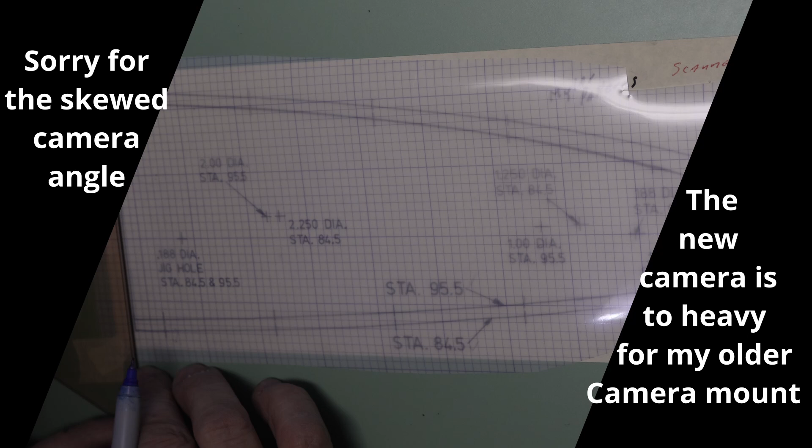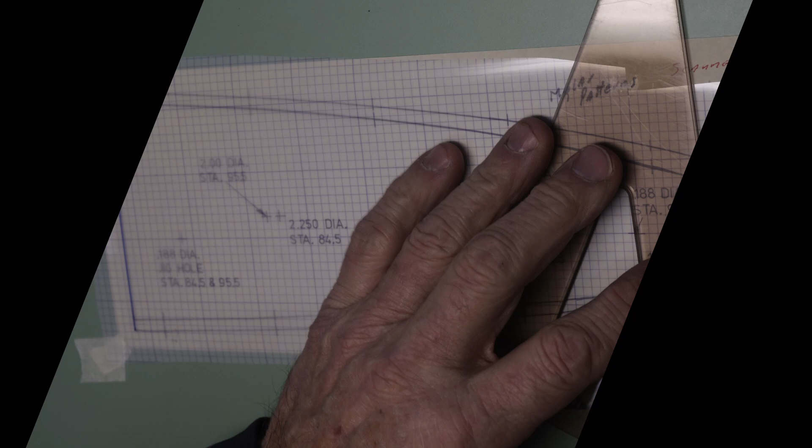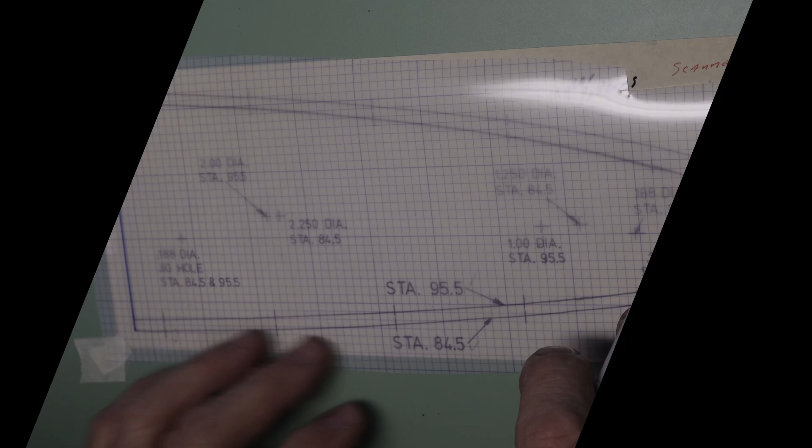All right, a little quick tip you might find interesting. I'm transferring some paper patterns for wing ribs over onto Mylar because Mylar will not stretch, so I can take Super 77 spray adhesive and glue it to material to build form blocks out of. If you use regular paper and apply glue to it, it will stretch. Mylar doesn't do that. Same way, if you use a photocopier to copy your plans, it's not going to give you actual dimensions. So what I'm doing is just transferring over to this Mylar.

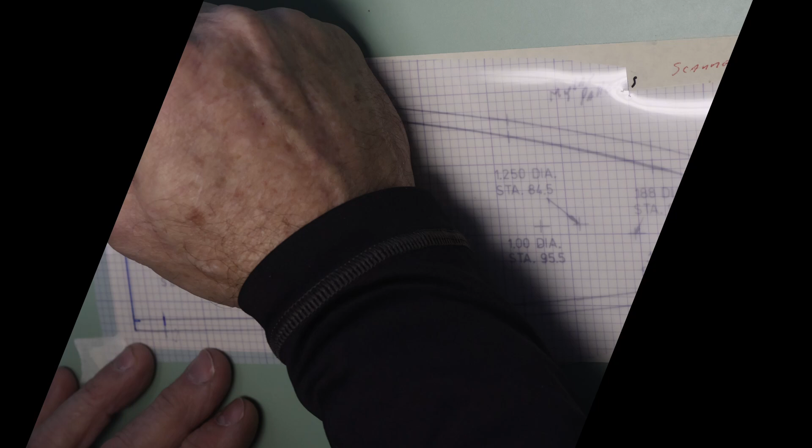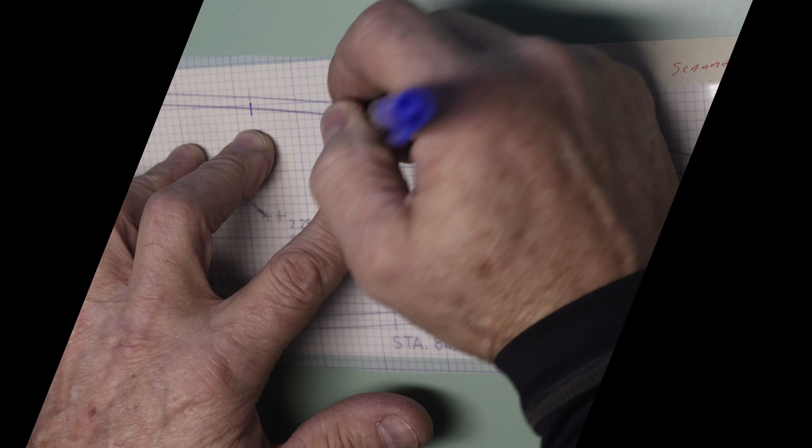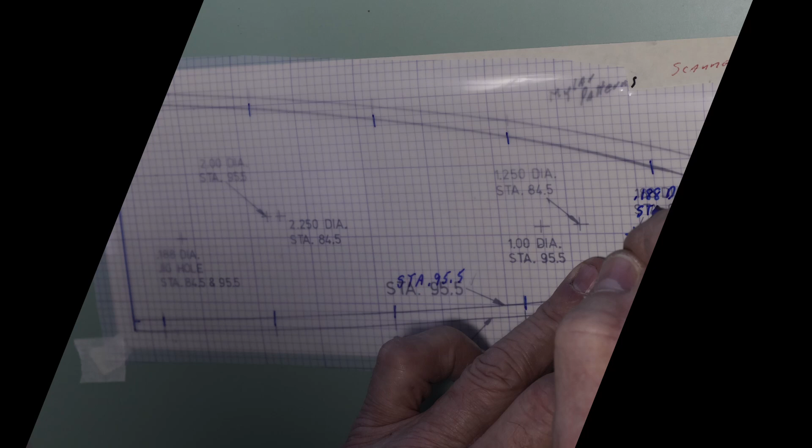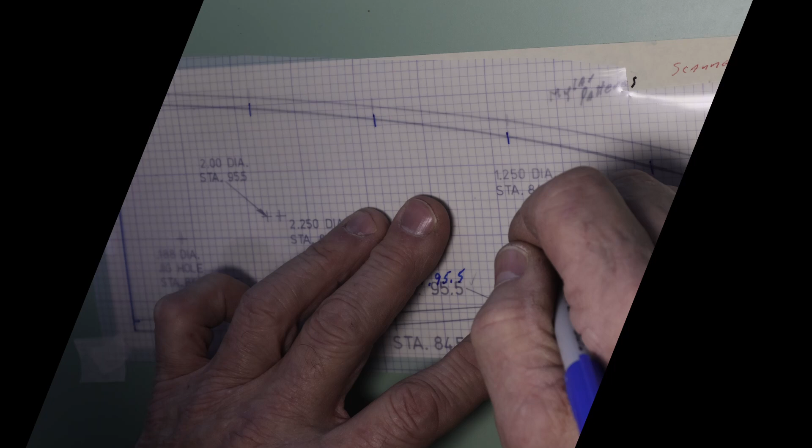One of the things that can be a problem is getting a nice smooth curve when you lay out the edges. I've already transferred the larger outer rib. There's a second, smaller rib, station 95.5, which I'm doing now. When you try to do these by hand, at least I'm not as steady as I could be transferring the curves over. So what I do is take a flexible metal ruler, and we'll show you in a minute. We're on station 95.5, and we mark out all our holes. This 0.188 diameter is a jig hole. I actually mark the station number on each one as I lay out the holes. It's not absolutely necessary, but it's a double check for me, so I make sure I've got the right rib holes and jig holes and lightning holes for both sizes, and haven't added anything I didn't need.

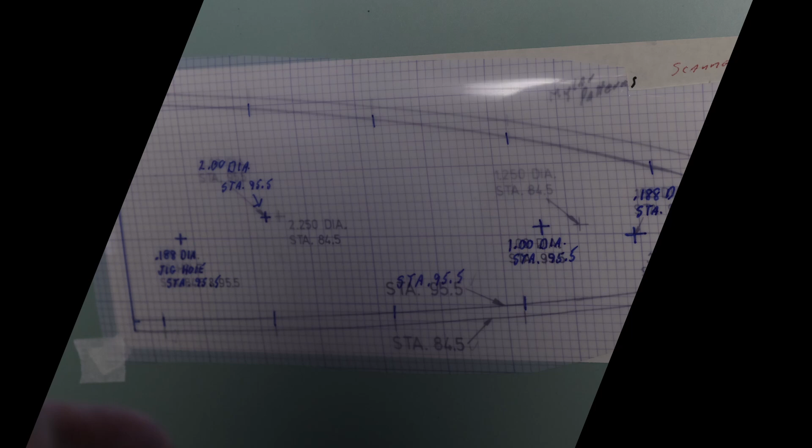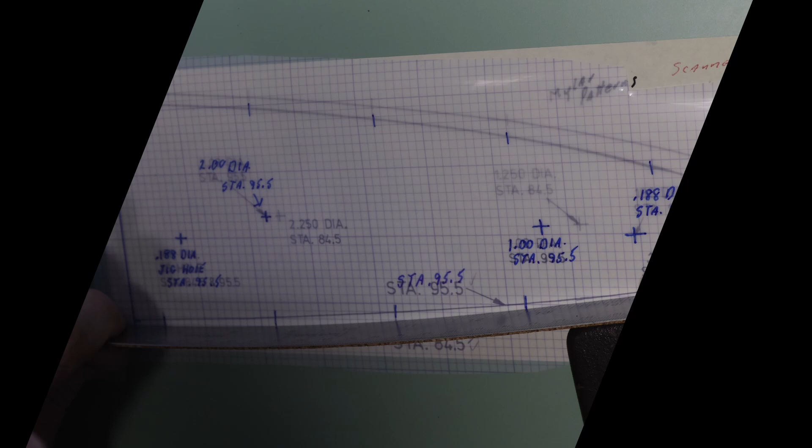That's all our markings other than the curves. The easiest way for me to do these curves, since I can be a little shaky, is I mark out the tight nose because it doesn't work as well otherwise. I do have a Gumby here that I'll use part of the time. To get a better line, I'll take a weight—in this case my pencil sharpener—and lay this out. A Gumby doesn't give quite as smooth a curve, and you don't even have to be right on your line with your mark. You can adjust your pen, but if you use that as a guide, even though I can be a little shaky, you can still get that nice smooth curve.

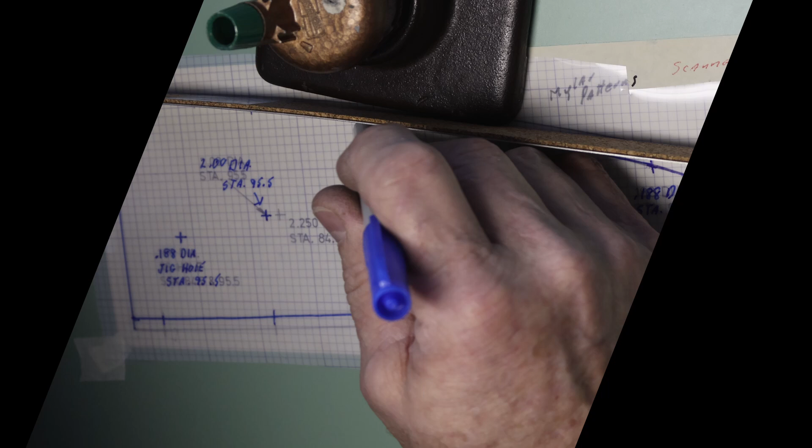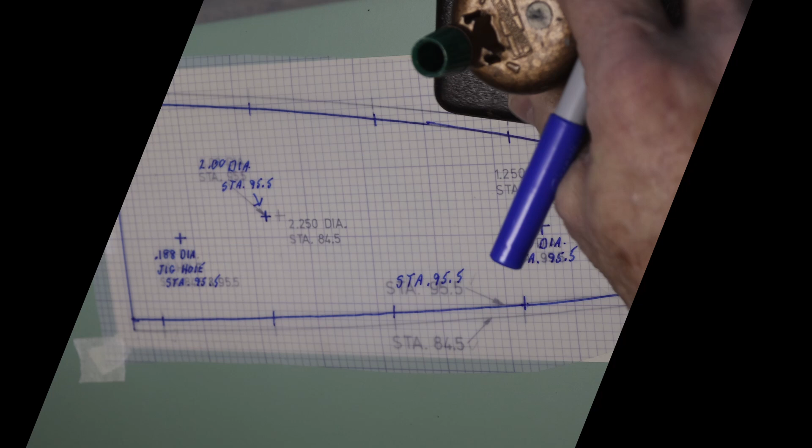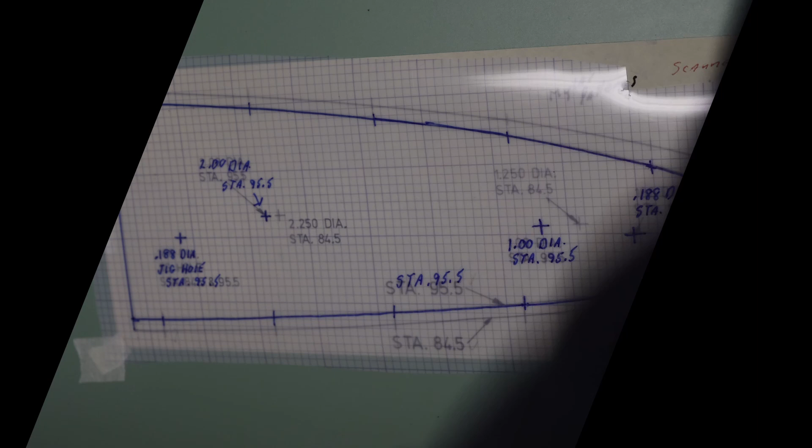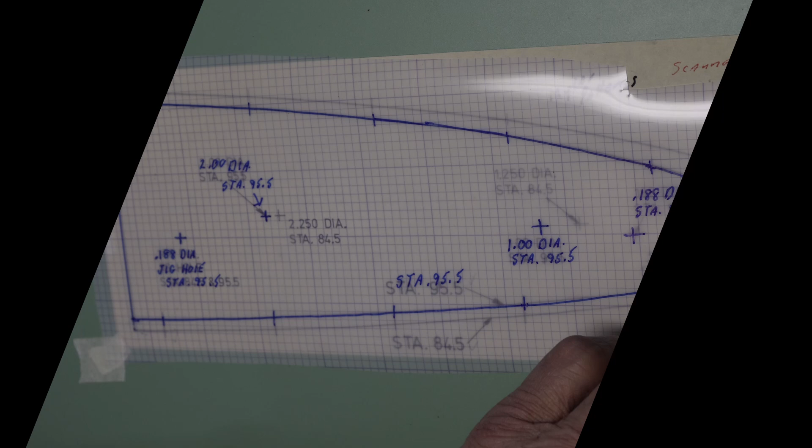So that's pretty much the way I lay these out. I go back and double check that I've got the holes before we untape it, and that we've got all our markings on. That's a little bit of a wonky mark there, but at least these are relatively straight, and they'll get corrected a little more when we start sanding form blocks. So just a little tip that might give a nicer result when you're playing with this stuff, and that's what we're doing—playing. On these I extended my lines as I was talking here, for the larger rib. So anyway, I've got a few more of these ribs to line out.

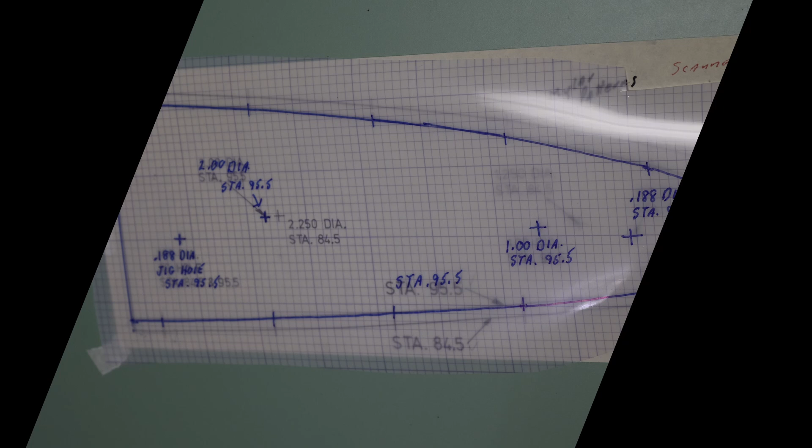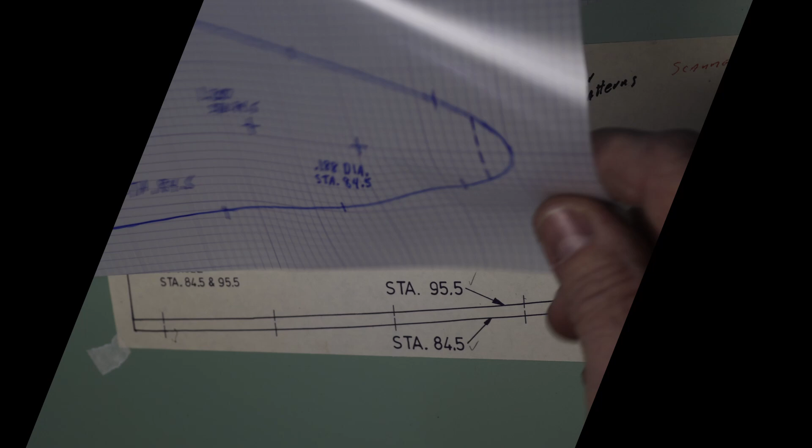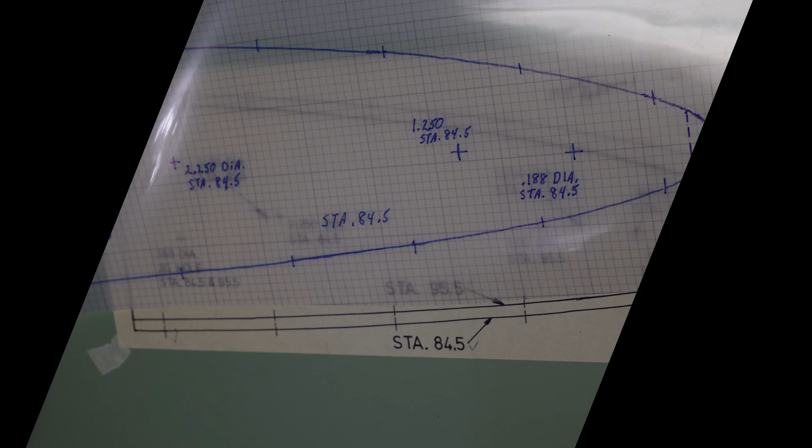This particular sheet—I bought this set of plans used a while back, and they've been transferred into my name. I am the legitimate owner of these, and you'll hear me harp on that quite a bit. Guys get a little testy about that, but that's too bad. Normally I would leave these in a full sheet, because there are notes that pertain to different things, so I'd keep them as one sheet, but these were already cut apart. Anyway, that's the way I lay out ribs and transfer them to Mylar. These are marked on there in Sharpie, and we can go ahead and Super 77 them to a form. For the main forms, we can be very careful about how we sand them, and they'll be our basic forms—we'll develop other ones off of that probably. That gives us a nice basic form. This Mylar can live on the MDF form blocks I'm going to build, and stay there forevermore for reference.